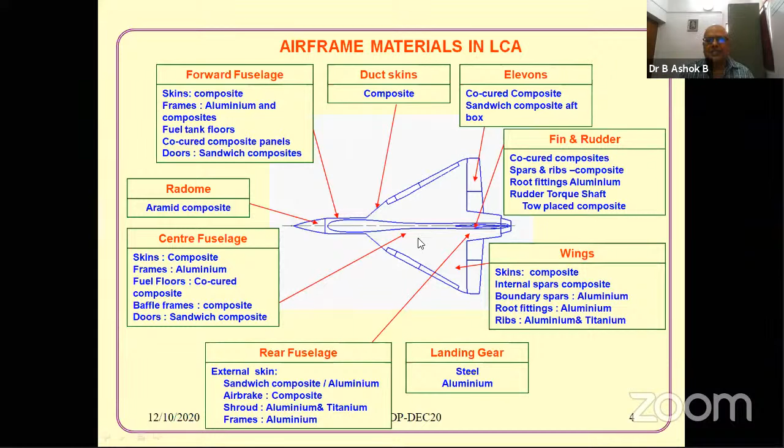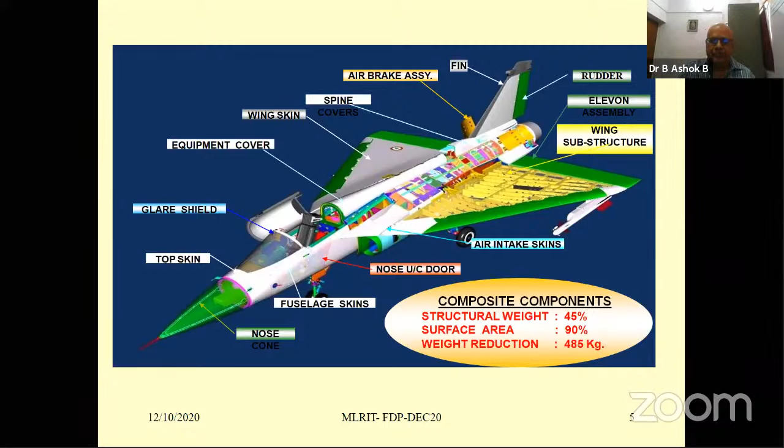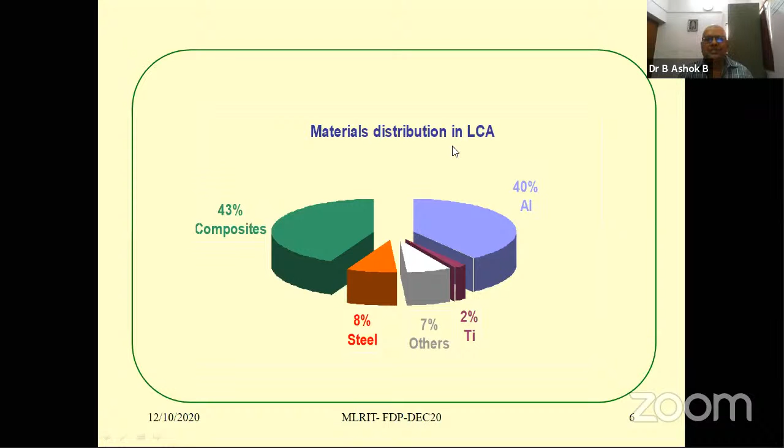Now, you would be wondering, the topic is about smart materials. Why are smart materials not shown here? Because they are much less than this, around 0.5%, but they play an immense functionality role. So if you are taking it as a percentage, they will be very less, insignificant perhaps.

Then I thought I should give you some history of how the materials got developed. I'm sure being in the aero field, you'll be knowing how aircraft design has changed, right from the days of the Wright brothers to the present day concept. Now the most advanced concept we are trying to make is air breathing engines, and also what is called multiple engines, and of course the hypersonic flow engines.

Now if you are looking into the materials as such, basically materials development here has been driven by design drivers. Up to 1930s, right from the Wright brothers' days to the 1930s, the primary consideration was static strength.

Then from the 30s to the 60s, what happened was they found many aircraft got corroded, some were failing because of fatigue. And so, apart from static strength, corrosion resistance as well as fatigue properties became the driver.

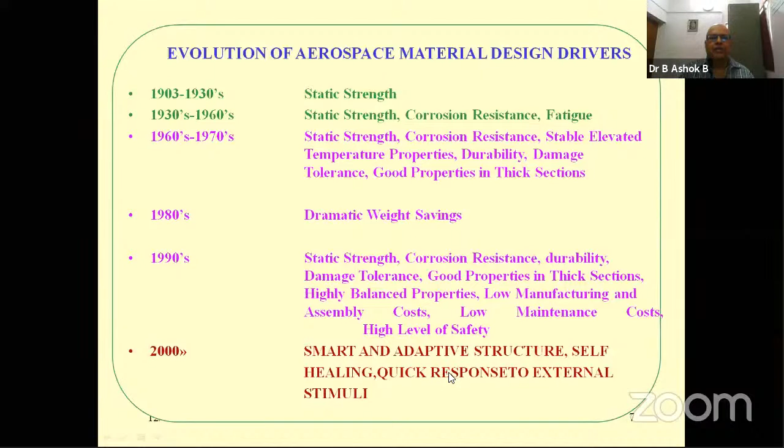Now we'll come to the main topic, that is what are shape memory alloys, how they had revolutionized the aircraft industry as such. Now, they are metallic alloys. Number one, they undergo what is called a solid to solid phase transformation, which can exhibit large strains, recoverable strains.

Now to give some feel - a typical material, if you take in a lab, maximum strain you can get is, I would say, 0.2%. Beyond 0.2, no. But in shape memory alloys, you can have a strain running up to even 7%, and then you can recover it - something like rubber. That is the beauty of this.

Then there are some terms you should know. There is a room temperature phase - this austenite phase, which is a high temperature phase, and typically it has a cubic crystal structure. I will not go deep into the crystal structures. Then there is a low temperature phase, the martensite phase.

Other thing is, many of you would think martensite means it is very hard. No, martensite is hard only for the iron-carbon system. Only in steels is martensite hard, but in other alloys like shape memory alloys, titanium alloys, martensite is a very soft phase.

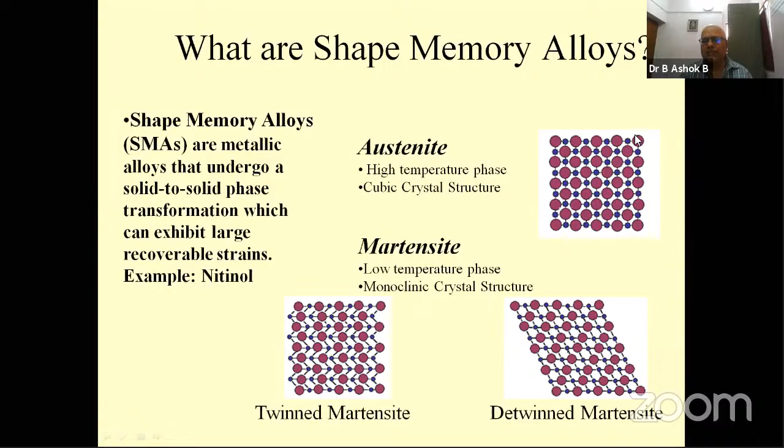Now I'll give an example. If you are taking some aluminum alloy and deforming it, now if you bring it to this shape, macroscopically you can bring it to this shape, but the atomic configuration will be different. But in the shape memory alloy, the microscopic transformation is repeated at the level of some atoms. So we are exploiting this property.

Now we come to thermally induced phase transformation. How do you induce the phase transformation? One way is to supply the temperature. Now when you supply some temperature, the phase is getting transformed.

Now you have to remember some terms here. When you are cooling, you have what is called Martensite start and then Martensite finish, because this transformation is happening in a range. Only in the case of pure metals do you have a single point transformation, but in alloys it is in a range.

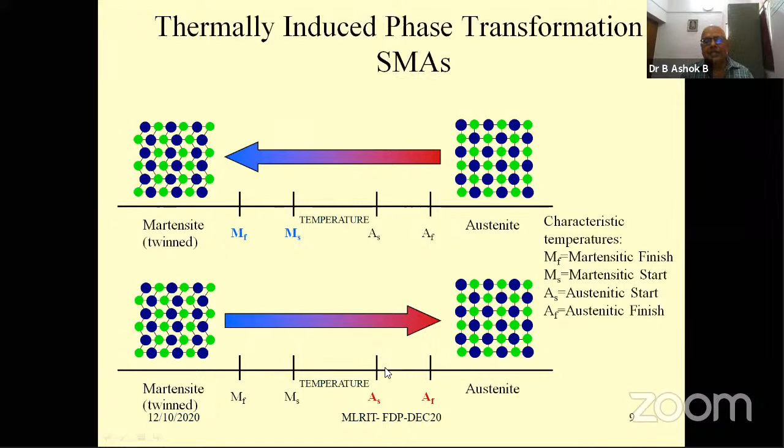Similarly, when you heat it, you have what is called Austenite start and Austenite finish. So these are the two terms you should know, and designers should know this because it helps in the design.

Then the shape memory effect - what do you mean by it? So here, what you are trying to do is either by temperature or by stress, you can change the phase. And this phase, when you remove the stress, it will go back, and then it is back to the original phase.

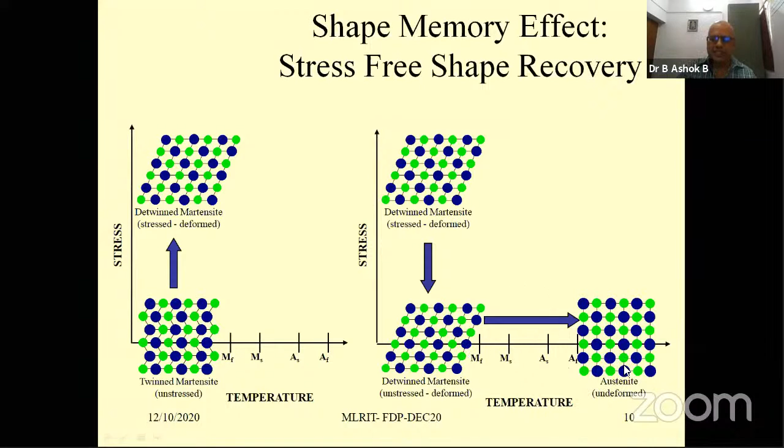So here the atomic level and the macroscopic level are perfectly repeated. This is called twinned martensite unstressed, detwinned martensite stressed, and then when you are heating it - heating means bringing it from liquid nitrogen to room temperature - it will come to austenite, which is undeformed.

Now this is the shape memory effect. Now you can see the stress and strain as you supply the strain. This can go up to 7%, something unique, and this 7% can be recovered back. But if you go beyond this, instead of martensitic transformation there will be some other transformation, and so repeatability is not there. So this is how it is. Now if you release it, it will go back to here.

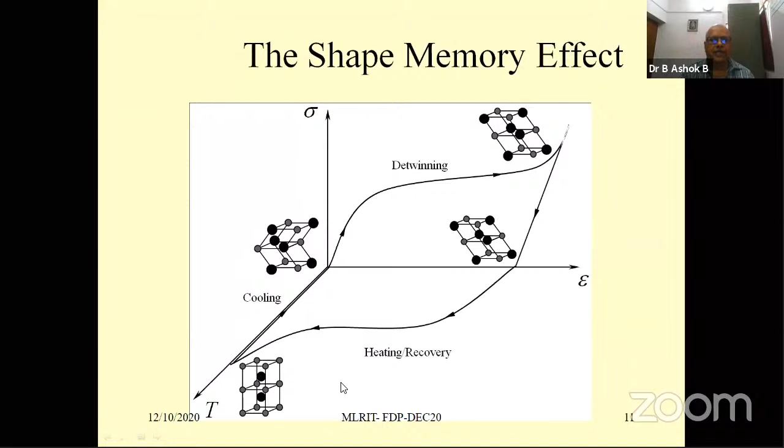Now how can engineering products use this? Now take what is called the pseudo-elastic effect. Pseudo-elastic effect means it acts like a rubber, it will stretch. But then this stretch can be recovered.

Example: take your spectacle. Those wearing spectacles like me know the nose bridge here - by repeated use, the nose ridge is not stable, it will not tightly clip your nose ridge. And the frames, because of frequent use, there will be some change. Now with this shape memory alloy, it will be repeatable. And these frames are already there in the marketplace - they are called titanium frames.

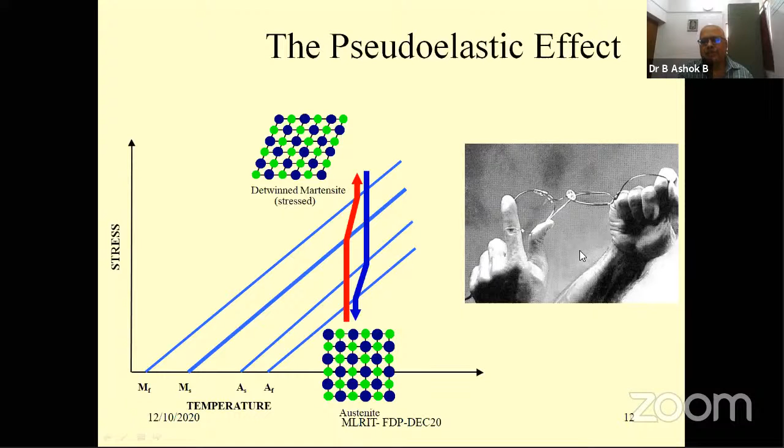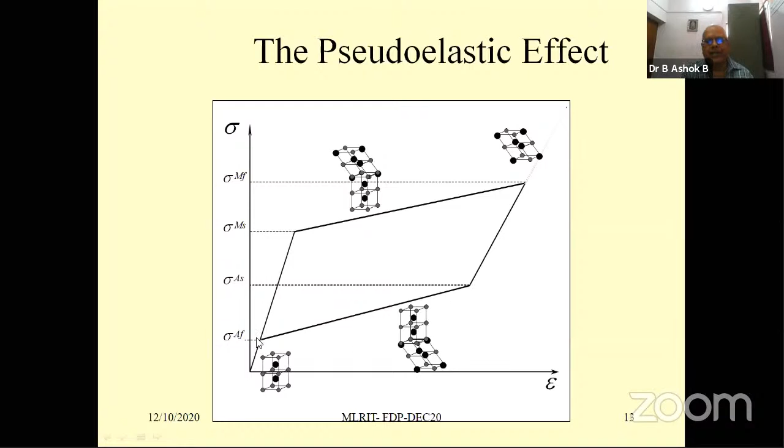Then there's the pseudo-elastic effect. You just see here - you can either supply stress or temperature. Here it is stress, and then you can apply strain, and you can see here, you can recover it back just by removing the stress.

Satya Prasad, do you have any questions?

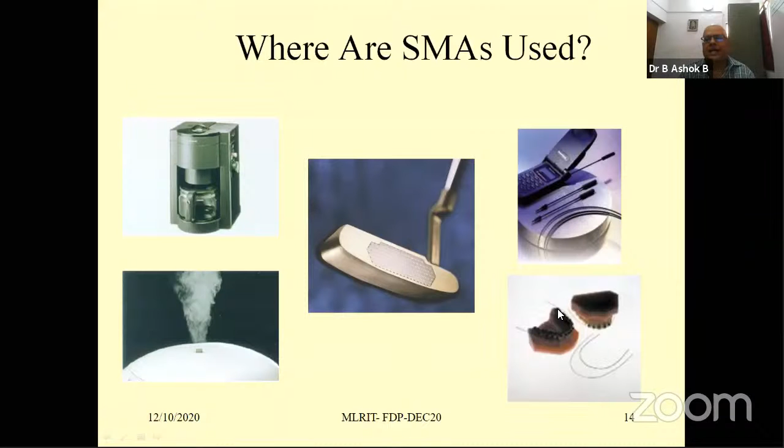Then there are biomedical devices. I would say nearly 80% of shape memory alloys are used in stents. These stents are just like a balloon with a catheter. It will go to the prescribed place in the heart, and at that place the balloon will expand in a controlled manner, removing all the clogging. In the advanced stage, you can also have drugs released at a prescribed rate built in.

Then here you can see the spinal support. When using shape memory alloy wires for spinal support, the spinal cord stays in place. People get pain only when the spinal cord moves. When these wires firmly hold the spinal cord, there is no movement of the spinal bones, so comfort level is high.

This is the denture wire. Okay, then that was covered.

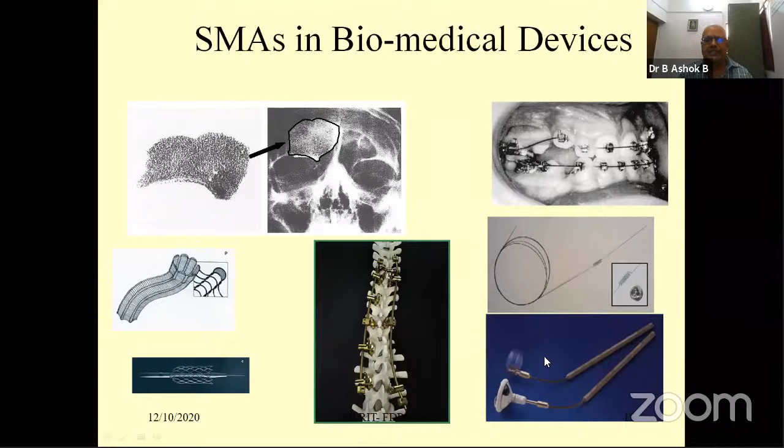Most production of shape memory alloys is in wire form, and here you can see a kind of resistance used basically for temperature control, which I will talk about later. This is how we can have an ejection system made out of shape memory alloy.

Shape memory alloys have also been used in Land Rovers. You can see the Land Rover here. It is used basically for actuating the rollers here, and this is the structure.

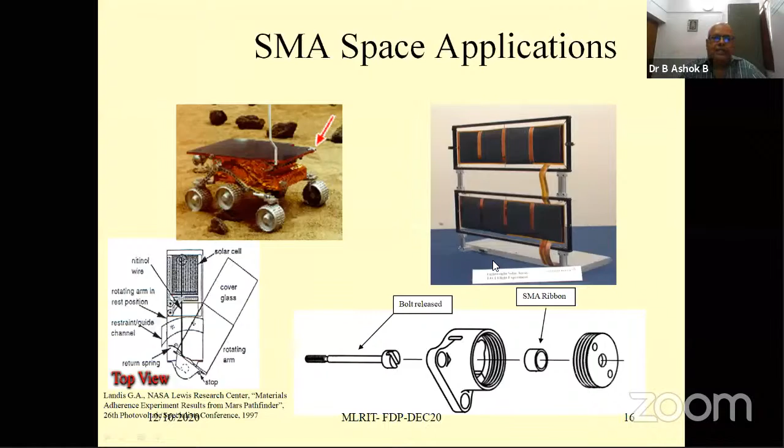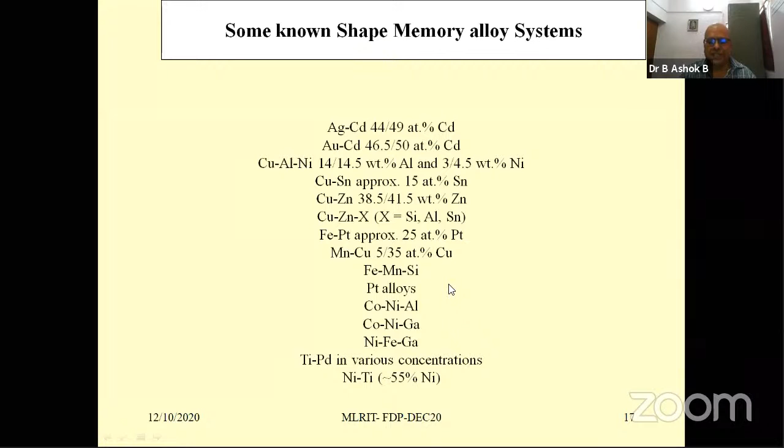Nickel titanium binary alloys are the thing here. The beauty of this is that by changing the crystal composition, nickel-titanium at times with copper also, you can have different transformation temperatures, so applications can go from minus 50 degrees to plus 100 degrees. Others are not used much. Platinum-based alloys are used for high temperature shape memory alloy applications, but they are still in the research stage.

Next I will briefly tell you the difficulty in making this alloy. For metallurgists like us, the basic route map is the phase diagram, which forms the basis. If you see the shape memory effect, it occurs in a very small, narrow composition range.

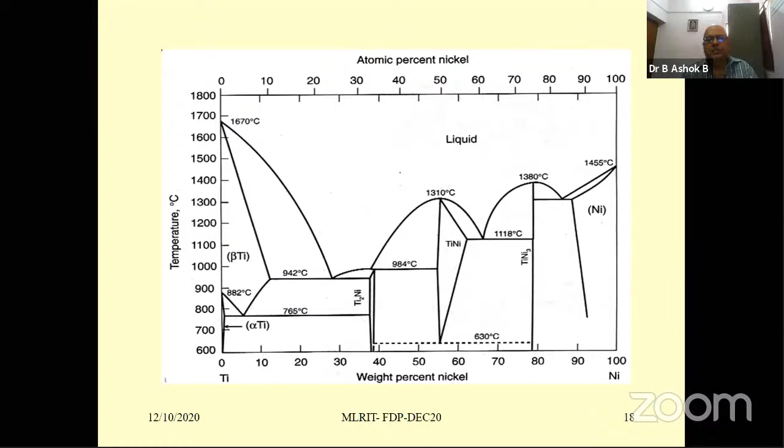That narrow range is about one atom percent, so your melting has to be very strict. It is something like semiconductor making, though not as tough as that, but I would say it's between conventional alloy melting and semiconductor melting. Since it has a very narrow composition range, you should have melting discipline, and the impurity level should be kept to the basic minimum.

You can see the small line. So now typical engineering alloys, if you see, the composition range will be huge, like 3 to 3.5%, and then 0.5 to 0.8%. But here it is in atom percent.

Here you can see as you change the nickel content in atom percent—because in engineering alloys you'll be using the concept of weight percent—as you increase it, the transformation temperatures will go down. You can see here it is almost minus 100 degrees C. Normally we go up to minus 80 degrees C, and the upper range is very close to 90 degrees here.

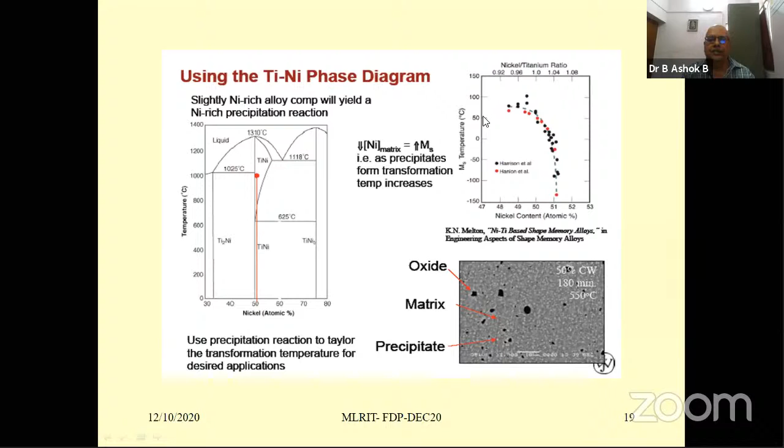And this is the microstructure. Then what are the requirements here? Now, having a shape memory alloy, if you want to make it work for the aircraft, what are the requirements? Basically, performance and reliability under sharply fluctuating conditions.

As you know, aircraft temperature varies from minus 50 degrees to plus 150 degrees C, and there are G loads—on Tejas it is 9G, but on other aircraft it can be much higher—and it should sustain vibration loads. It should operate in all weather and meet the project goals.

The project goal is reduced weight and volume, because once you open an aircraft, it is all jam packed. There is no place even to service or put your hand in.

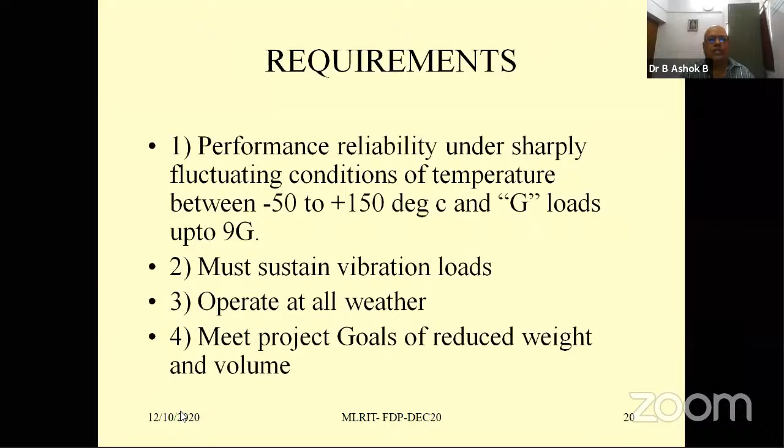Now, our testing protocol is basically designed to fulfill these requirements. We have used the shape memory alloys basically for the conduit tubes.

These conduit tubes go into the wings, and as you know, the wing is a fuel tank. This is the typical conduit tube. Outside the conduit tube is fuel, and you can see the aluminum rod, the aluminum tube, and the shape memory alloy ring—a small ring which will securely clamp. This is the insulator, and then again the circuit. So basically, the shape memory alloy here is clamping the insulator, which is PEEK, to the aluminum tube.

Now why have we used this? Using carbon fiber composite, you have to pay a penalty—the penalty being that static charge will be accumulating. The static charge comes because of lightning.

I think you will know that lightning occurs every minute somewhere in the world, and I'm sure some of you frequent air travelers would have also observed lightning at close range. Now when this lightning happens, there is a static charge, and when the static charge occurs, it will lead to a spark. The spark can ignite fuel and burn the aircraft.

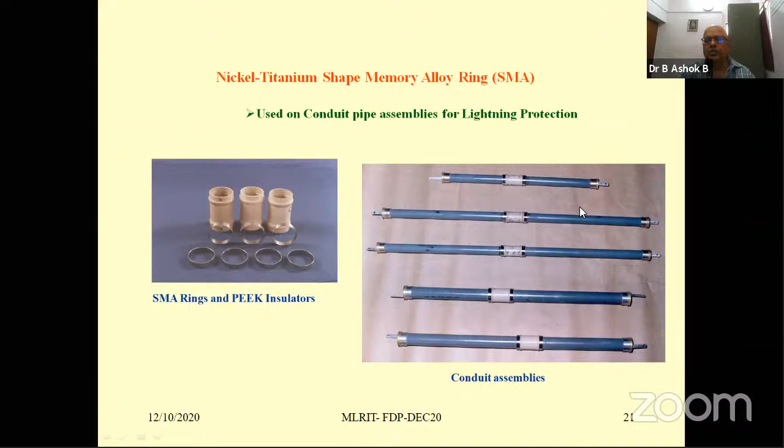So, as a shield against the static charge, we have used an insulator here—PEEK. So the static current can be blocked here.

Now you can see these conduit pipes go here, and these conduit pipes carry hydraulic oil, fuel, or they can also carry harness wires.

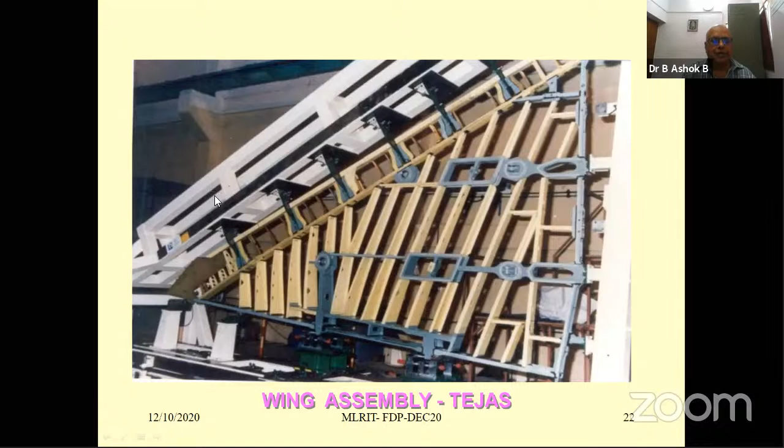So this is the wing here, and the jig here—of course the jig is a critical part, and it should have close dimensional tolerances, less than 0.1 mm. Then you can see here, this is the insulator, this is the thing.

Now, next point—being an engineer, why is it that we have gone to shape memory alloy and not to other means? Initially, when we had difficulty getting it from the market, because being a high technology item we were not getting supplies, we tried some other methods.

Now here the requirement is, once you close the wing, it is shut for nearly at least 15 years. So for 15 years it should work safely and securely. Any other joints we tried, like clamping and all, were giving way, and that led to another set of problems. Once the joints give way, it leads to catastrophic failure for the aircraft.

So we have used these shape memory alloys. Now I can tell you, so far the aircraft has flown in our border regions—in the Eastern Ladakh region, in Eastern Kashmir, and in other places. We have clocked more than 30,000 flight hours, and so far not a single failure has occurred. That is the kind of reliability we are getting from this.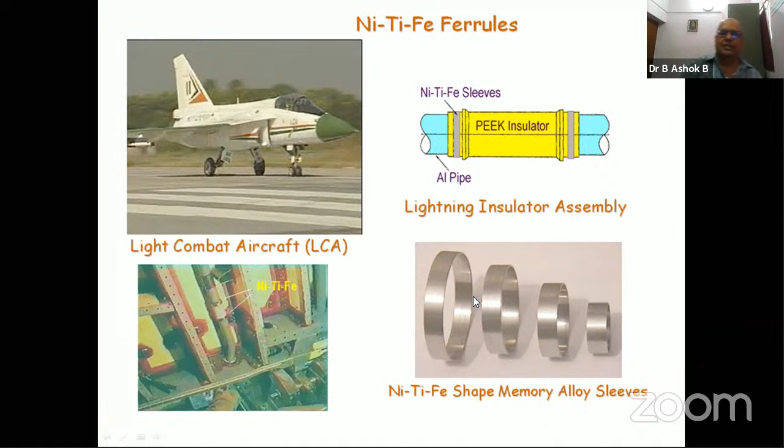What about the sleeves? Okay, then you can see the fuselage here.

Again, you see the jig here, and the fuselage is made of various stations, 1 to 1,000 stations, and for each station you will have a certain engineer to look after it. So assembling it is a unique challenge here.

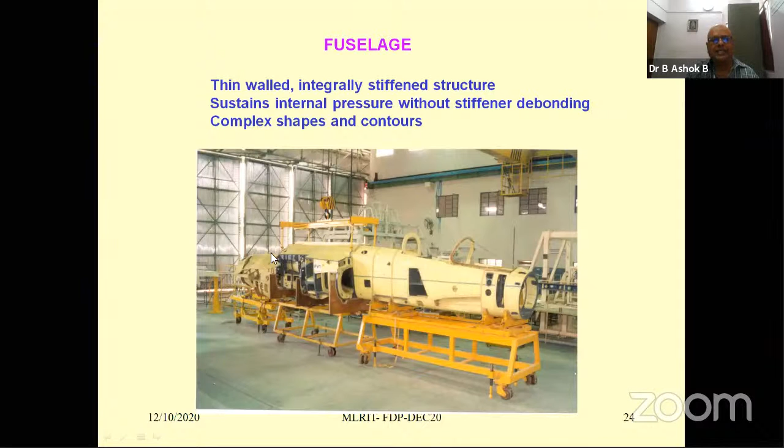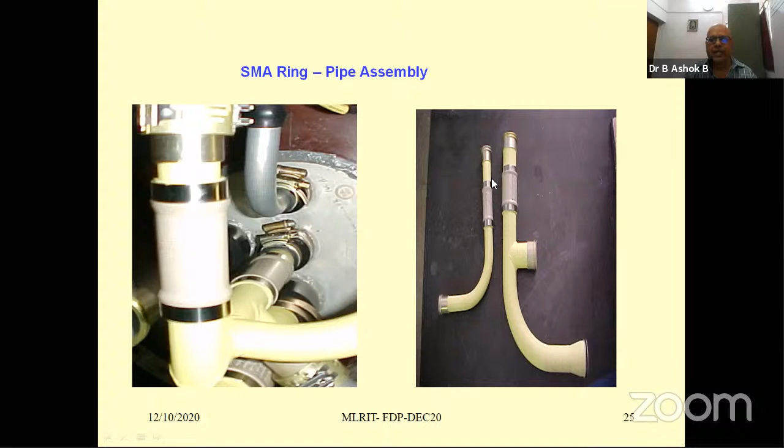Then you can see in the drop tank how the shape of the alloy conduit pipes are going. You can see the ring here, insulator, aluminum pipe, and inside the drop tank it is going. This is the assembly here.

Then here, what is this? This is what is called the constrained mode of recovery. What you basically do is you try to cool it first, then expand and deform it. So your design would be such that it is just equivalent to the outside diameter, or even slightly less.

When you cool it, the martensite comes. What is something like 72 kg per mm square becomes something like 6 kg per mm square.

You can also deform it by hand, but since you are using liquid nitrogen, you use a tool to expand it and increase the diameter. At this point, when you put it in from the liquid nitrogen and leave it in air, that is equivalent to heating. So it will remember its original shape and try to come down.

So what happens is in this process, the strain is constrained. When strain is constrained, you will have clamping stress, and this clamping stress is a constant value. It is constant here.

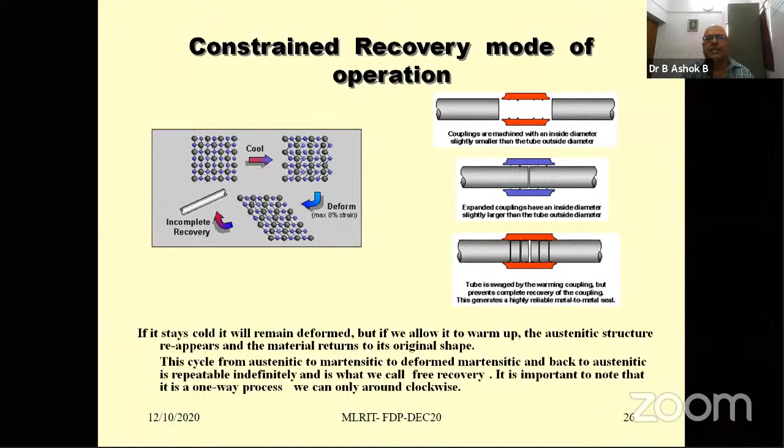That is the advantage. Now, what we thought was, after this, we have many tube joints, and for these tube joints too we thought we could do this. The advantage is the weight is very less.

Earlier we had swaging type joints. In swaging type joints, this Permaswage and others, it was something like 100 grams. From 100 grams, this is hardly 2 grams. If you have something like 1,000 joints, just see the kind of weight savings.

Then you can also have fasteners. The beauty of these fasteners is you can give controlled torque. In many areas you need controlled torque, and this controlled torque will be constant throughout the service life.

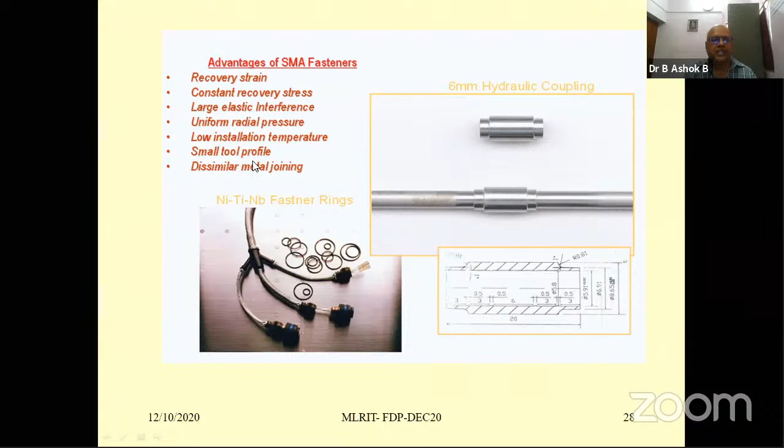Advantages of these SMA fasteners are recovery strain, constant recovery stress, large elastic interference, and radial pressure uniform throughout - no matter the size, the stress applied is uniform. The tool profile is very small, and you can do dissimilar metal joining with it.

Now this is the SMA technology: austenite, cool into martensite, deform - 8% is the limit - and then if you warm it, it will come back. This is an inherent property of the material, and it is repeatable. You can repeat it for several times.

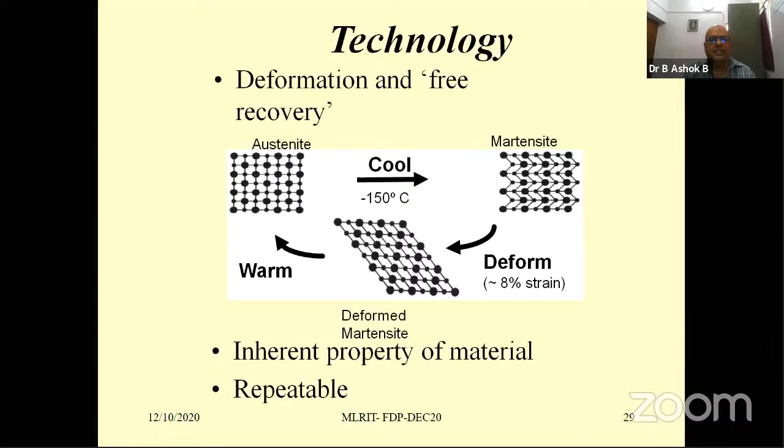So what we used is the one-way shape memory alloy. By doing this repeatable thing, you can also have applications based on the two-way shape memory alloy.

So this is the installation. You can see the tube, it is cleaned, sealant is applied, and here you can see the insulator piece where sealant is applied in the ID.

Now it is matched, now inserted, and you can see the SMA sleeve. You're using a tool to expand it because it is liquid nitrogen - you can't put your hand there.

Now there is also another problem - he is doing it without gloves. Normally, since this technology was ours, we have told that these things should be done with gloves, because you are dealing with the liquid nitrogen tank here. And then, this is the tool here.

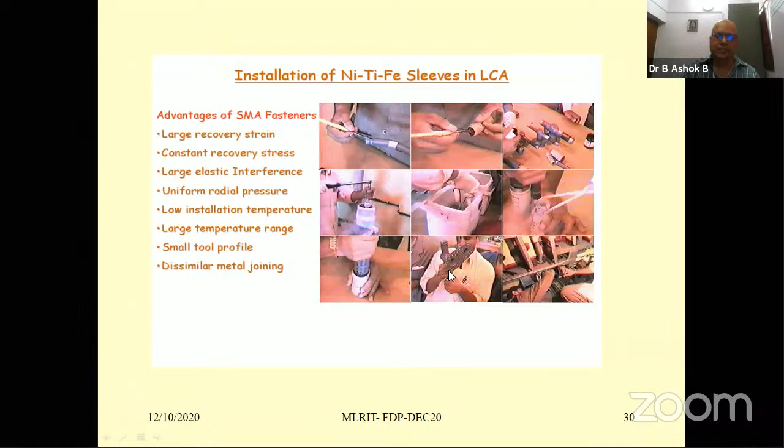Then we thought we could go to the next level. Another beautiful application is the wavy springs. In these springs, the design thing is you will see the spring constant. The deflection is directly proportional to the applied stress, and the constant factor is the spring constant. But the beauty in these wavy springs is there is absolutely no vibration at all when you have these springs in motors or other places. The vibration energy is being converted into transformation energy, the entire vibration energy is transferred, and then it will be a quiescent kind of working.

Now this idea I got because I had seen in seismic areas like Japan, they use shape memory alloy blocks at the foundation level. So during any earthquake, the seismic vibration will be absorbed by the shape memory alloy block, and it will not get transferred to the buildings. Based on that, I tried this concept, and this concept has worked.

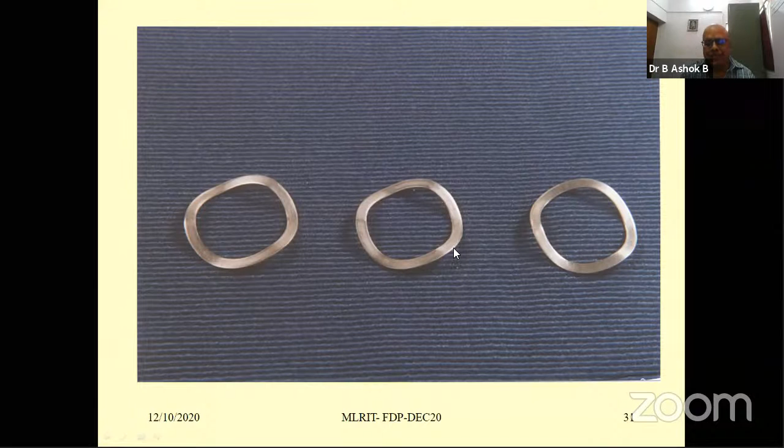But the real problem here is how to design this. Then I thought I should tell you what are the current international efforts.

What we have done is at a shoestring budget, hardly 5-6 lakhs, we developed some technology, but in other countries it is at much more massive scales, by several orders. One such thing is the DARPA program, where there is collaboration between industry members and universities. I am happy because I try to involve many institutions and colleges into our program. I do see now, compared to those days, there is a lot of collaborative effort, which I think is going in the right direction.

Then there is the shape memory alloy consortium, made up of four universities and three companies. Then there is the SAMPSON program, where government agencies, universities, and companies are involved. So the basic aim is this is an interdisciplinary effort.

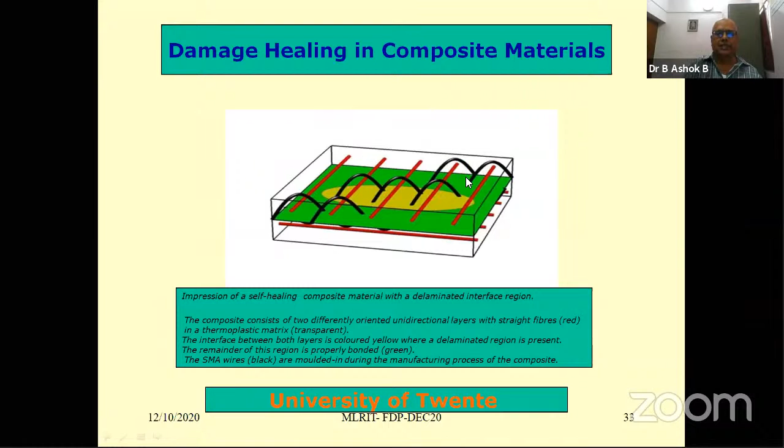Then next is how to have structural health monitoring, because why we are very keen about this is aircraft typically cost anywhere from 300 crores to something like 2000 crores, and maintaining its structural health is one critical need. So here we are trying to see if there is any advanced means to know if any defects are inside.

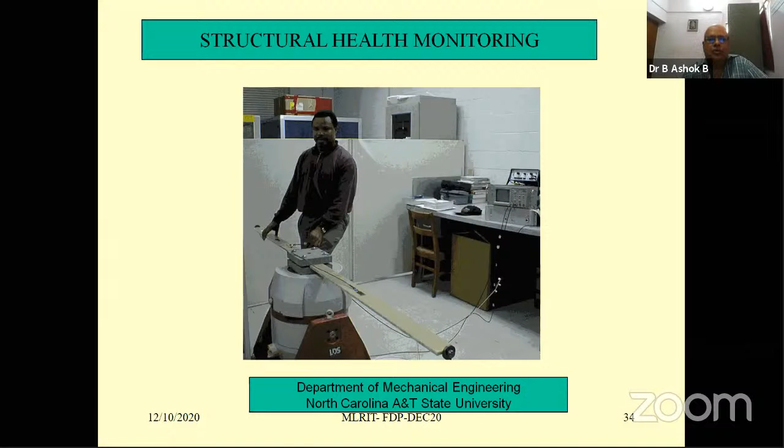Then another important application currently being practiced addresses one problem with airports: noise. There is now an international guideline that noise level has to be less than 80 dB or so, I'm not too sure about the exact number. 80 dB, I do remember. Now how to reduce the noise?

One way is to have a shape memory alloy in the engine, at the outlet nozzle, as we call it. So here what happens is by increasing the diameter, the noise level can be reduced. This is one such technique, and it is already practiced in Boeing aircraft.

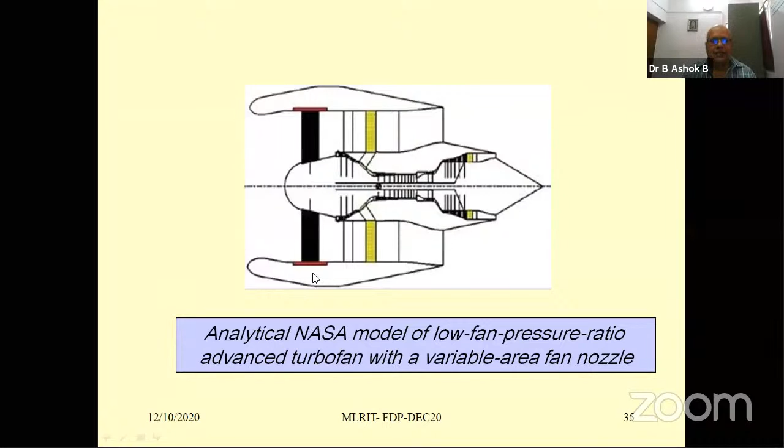Now, of course, what you see is an application, but to achieve it there were a lot of calculations, a lot of trials, a lot of frustrations. This happens with any new product. So here you can see how the shape memory alloy is used to control the noise.

At the starting point, what happens is near the airport, it will simply expand. Once it expands, the decibel level will come down.

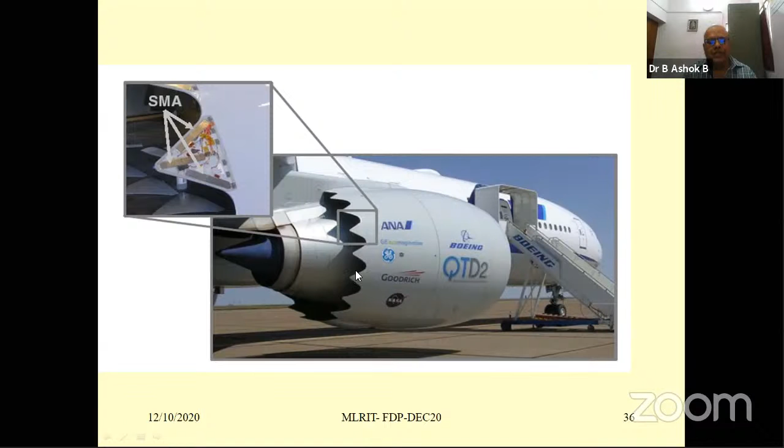Lockheed Martin also worked on this. Why not have bird-like flying qualities? Can we fly autonomically? Most aircraft technologies have basically been copied from birds.

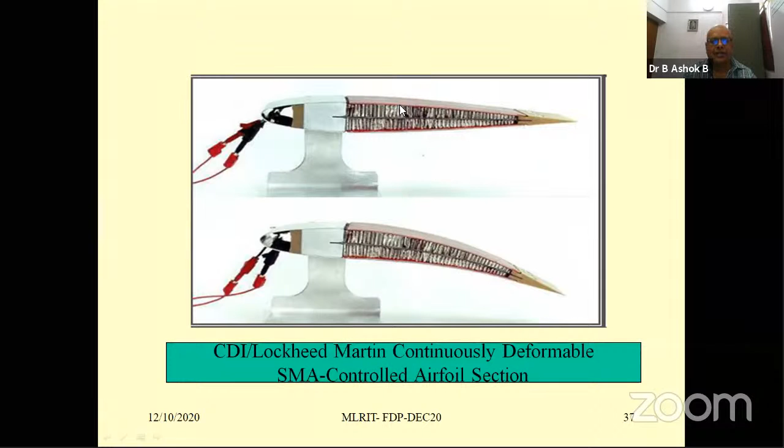Now this is the next stage, using shape memory alloys. This is again laboratory type work wherein they are trying to have autonomic movements.

Now how was success achieved? For any success there is a lot of frustration in the cycle. First, we went through basic science. We did not go through any other route; we went basically through the paper-pencil route, computation of clamping stress, which is based on aircraft designers' inputs, then understanding them.

Then you need to do alloy design, which is based on the above. For this we use tools like Thermocal, because you should know what alloy you should use.

Then the process design, which is based on coupon test. Then processing maps, we tap the IAC there. Then fine tuning the melt, which is based on computational thermodynamics.

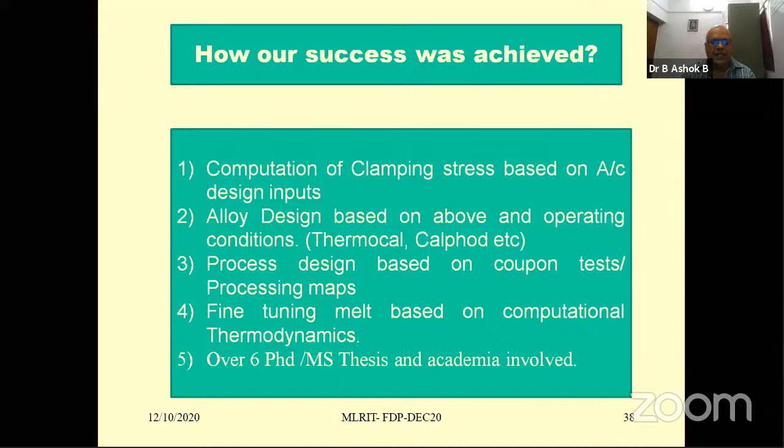Based on this work, what we also did was involve young minds at various institutes. Over six PhDs and MS theses were produced from this project.

Then what were the design issues? First was clamping of joints. Traditional interference joint design won't work. Instead, you have to use the transformation enthalpy, and with this calculate the elastic strain energy, and then come to the isochronous clamping stress. It's a very simple hand calculation; isochronous thermodynamics will also do.

Then for springs, the traditional spring constant approach will not work. Instead, the design should be based on minimum energy level. The trick is to convert all your design inputs to the isochronous energy level, and the transformation is having an energy level.

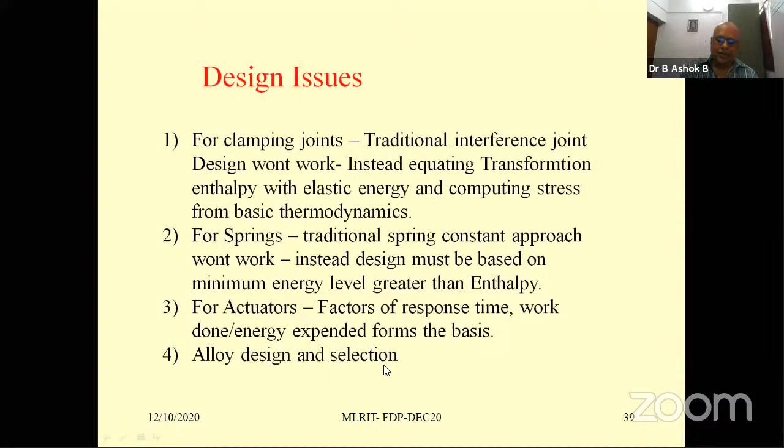Then what are the issues and concerns? Some limitations - any new material has its own plus and minus points. Plus points we have spoken about: reliability is very high.

Minus points are: it is difficult to design, because design is based on new concepts. Then the disadvantage is it is notch sensitive, it has poor fatigue, and then it is costly.

Now, one thing unique was our cost price was a fraction of the cost price of the same material abroad. So this is a case where indigenization effort resulted in huge cost savings.

Now this cannot be used as a structural member, so it can be used only for a functional member. Then the other thing is the degradation mechanism is not known, because all I can tell is up to 15 years you can use it, but beyond 15 years, unless you have tests done, you can't say.

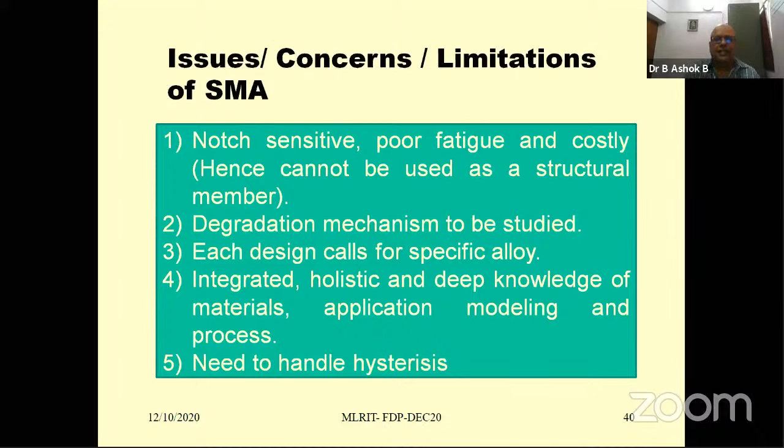Then each design calls for a specific alloy. It is an integrated, holistic, deep knowledge of materials, applications, and modeling process. It is an interdisciplinary approach, because I would call aircraft a cocktail of all technologies. I'm sure you as aero engineers would agree with my view, and then there is a need to handle the hysteresis - that is a real challenge here.

Then what is the difference between conventional engineering materials and shape memory alloys? The design is based on conventional methods, but shape memory alloys are designed for a given application. You can buy a steel bar or steel rod from the market, but in shape memory alloy, you have to design right from the alloy stage to the melting stage - whatever it is you want.

Then quality checks - here the standard specifications are there for chemistry and mechanical properties.

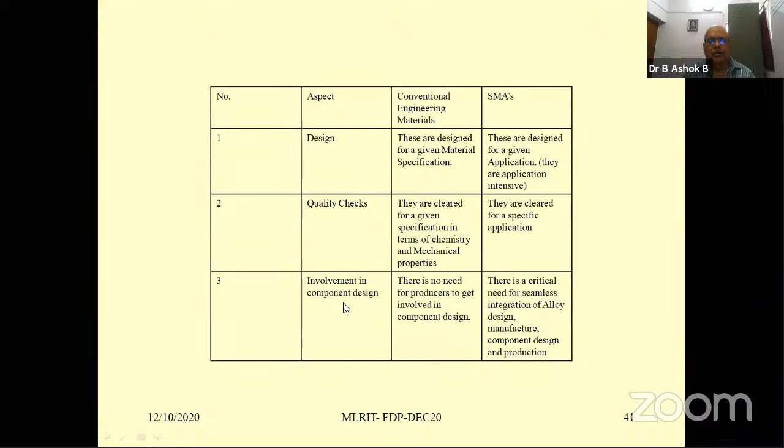Here, clearing is only for applications, not for properties. Then there's the involvement in component design. There's no need for producers to get involved in component design. If you make a steel bar, there's no need for you to talk to designers. But here close involvement is required.

Then coming to structural design, it is somewhat easy in conventional alloys - a linear model - but in shape memory alloys you're dealing with non-linear behavior, so you have to use FEA tools. Then if you see the usage, it is general purpose engineering, but SMAs are used only for specialized applications because you can't use them for structural purposes.

Then manufacturing - it is repeatable, you can achieve 3 sigma level, but here each melt needs to be engineered. Then the QC tools - conventional lab mechanical testing is okay, but here you need sophisticated tools like DSC, XRD, TEM.

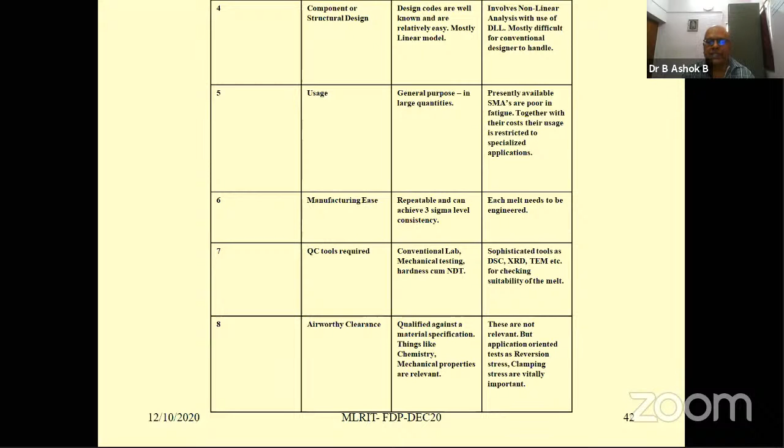Then airworthiness clearance - just to brief you, before you put anything into the aircraft, whether it's a pin or a sleeve, you should have an airworthiness clearance, and these airworthiness clearances here are a challenge. Okay, then what is the strategy we had?

We thought we should create our own indigenous production facility, create a center of excellence wherein there is material modeling, application engineering lab, and of course integrate all of this.

Then, of course, we had tasted some success. This is the 20 crore plant. This is a shape memory alloy plant, first plant in our country. I would say the first dedicated plant in the Asian continent, and maybe one in three or four in the entire world. So we had established it.

Then we had the roadmap of the SMA products. Having created the plant, having created the SMA facility, you should also have applications. One is conduit tube SMA fittings, which you have done. Cryofit for high pressure hydraulic tube SMA coupling.

We have done wavy springs. Then the temperature control valve - now what we do is we are using wax. The problem is after some time the temperature stability is poor, but in shape memory alloy temperature stability is high.

I'm sure even in your Maruti cars earlier the temperature control valve was wax based. After some time you will have to replace it, but if it is made of shape memory alloy you can use it throughout the service life.

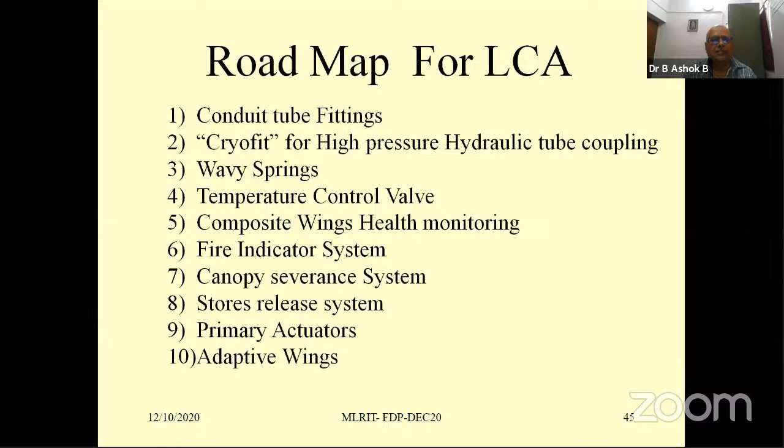And then the canopy severance system - how to sever the canopy. I'll have a slide later, I'll show that. And then the stores release system, how to release the bombs and other things. The next slide I'll show that later. Then primary actuators and the adaptive wings - that is the ultimate goal. Of course we were able to achieve some 3 or 4 by the time I retired last year.

Then this is what is called the canopy severance system. Now if the pilot is faced with an emergency and his life is in danger, what he will do with the present concept of canopy severance system - there's an RDX layer, which you make for bombs. He will activate that, it will burst out, and then the seat ejection system is here. The pilot will eject, and then a parachute will be there to drop in.

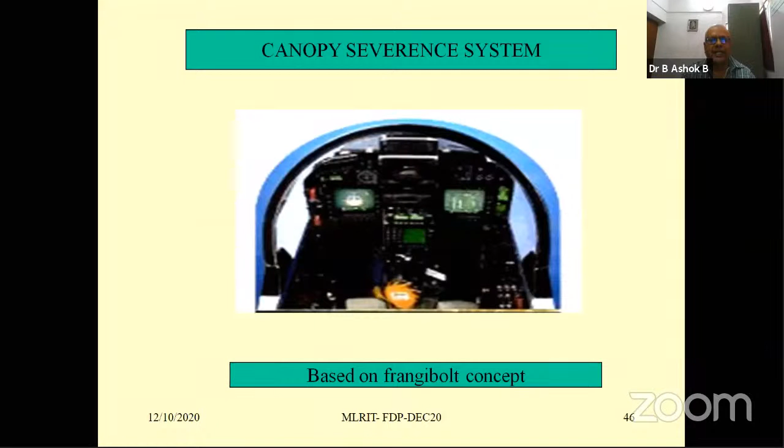Now, in the present concept there's a frangibolt. Instead of having this RDX, we'll have a frangibolt with a notch - a pre-stressed notch - so that once you apply stress there, it will break out and then it will come loose.

So for the fire sensor, as I told you, we are using the chromel-alumel wire. Now the proposed scheme is an SMA wire with the transformation temperature at 100 degrees. That way we can detect any fire there, so there is no false signal here.

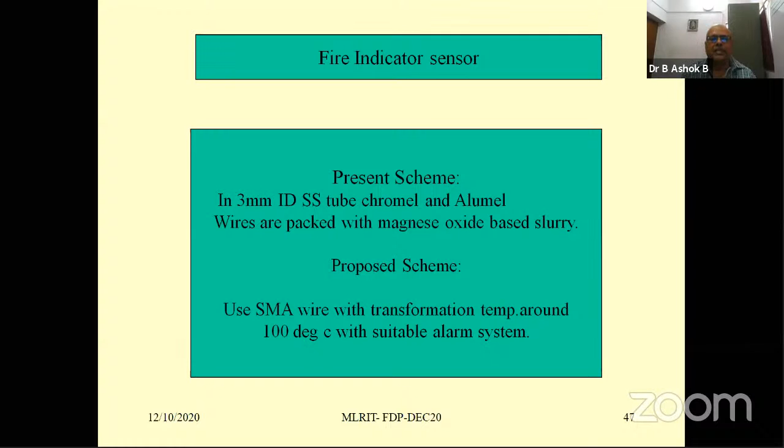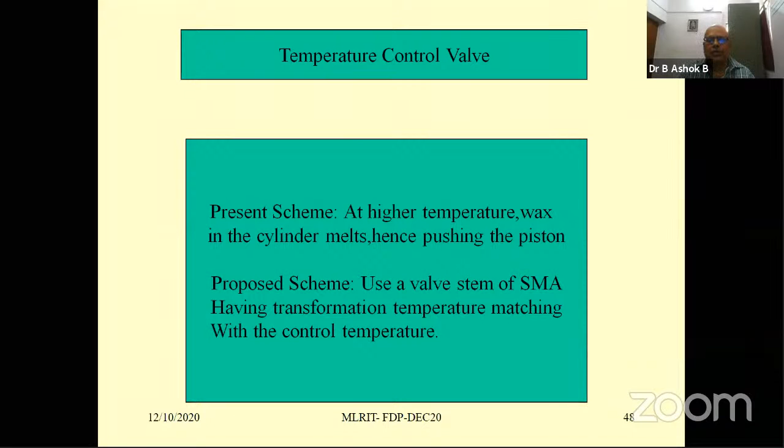Okay, next is the temperature control valve. From high temperature wax, we go to the valve stem, which is made of shape memory alloy. These are the SMA actuators used for this thermal control valve.

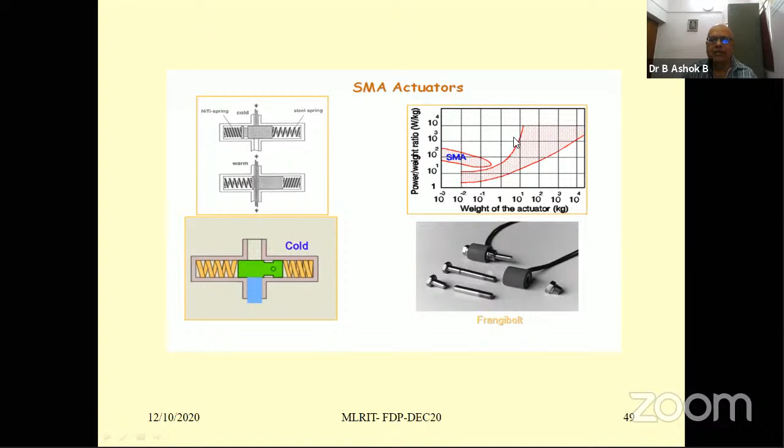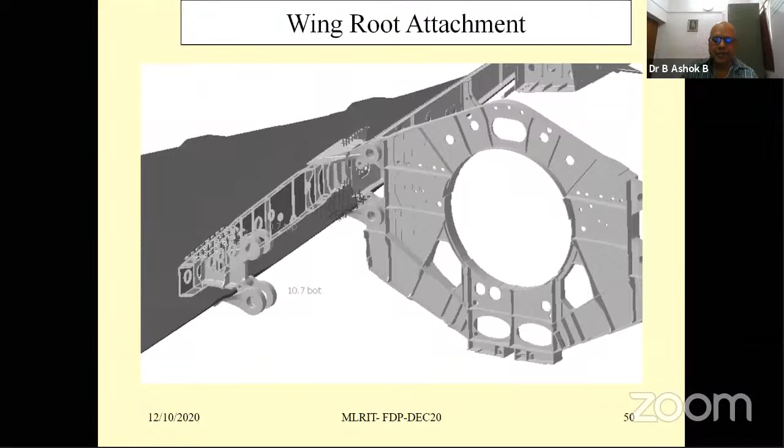So here, what we do is use a bolt with a predetermined torque - the torque is constant, and what happens is you get absolute safety, predictability, and reliability.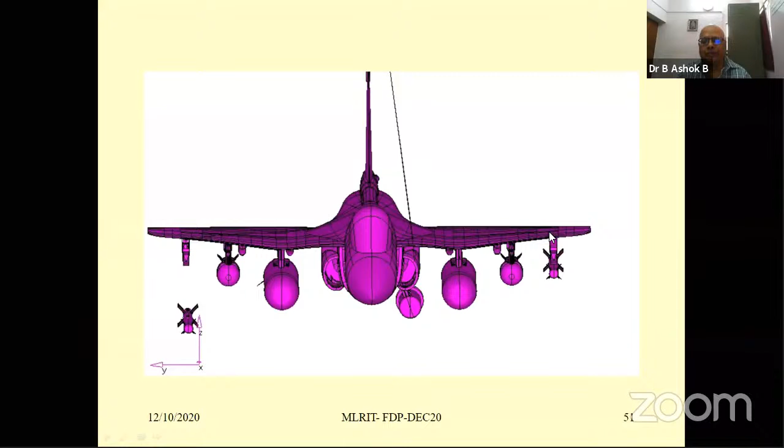Then coming to the stores - what I mentioned, these are the stores, bombs, various bombs. These are laser guided bombs, and you can see the air intake here. To release them, we use a hydraulic system. If you have a shape memory alloy system, the release will be faster, and you can release it at a predetermined trajectory, so that you have an efficient means of delivering the weapons or stores.

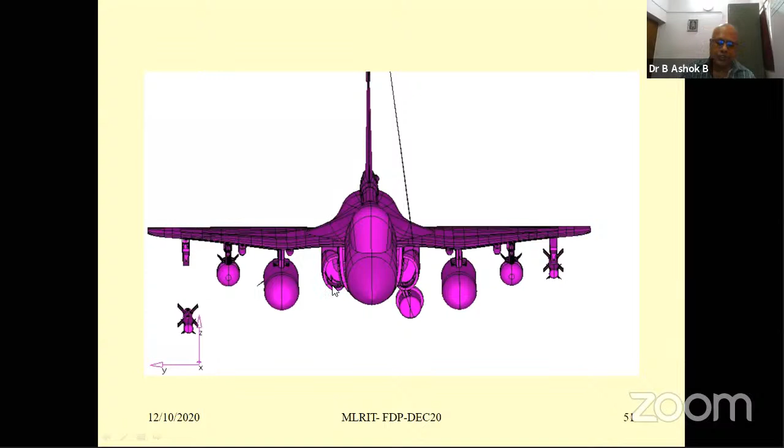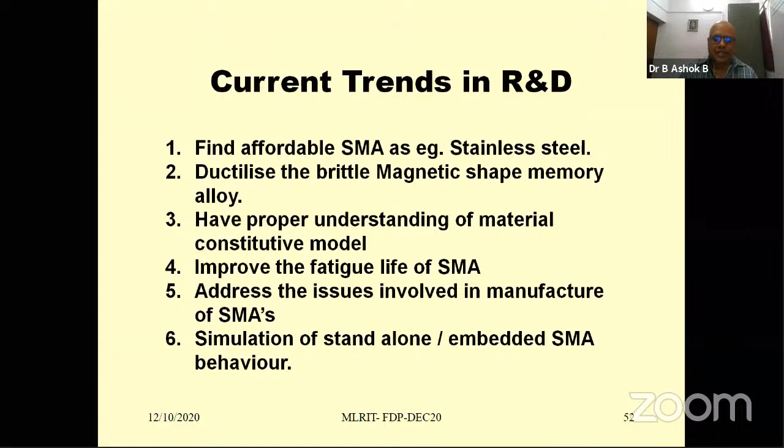Then, what are the current trends in R&D? I thought I should share this with you. First is to find an affordable shape memory alloy - it could be some stainless steel. Then, how to ductilize the brittle magnetic shape memory alloy, also known as Heusler's alloy, since it has a brittle property. We need proper understanding of material constitutive models, improved fatigue life of shape memory alloys, and to address issues involved in manufacturing them, along with simulation of standalone or embedded shape memory alloy behavior.

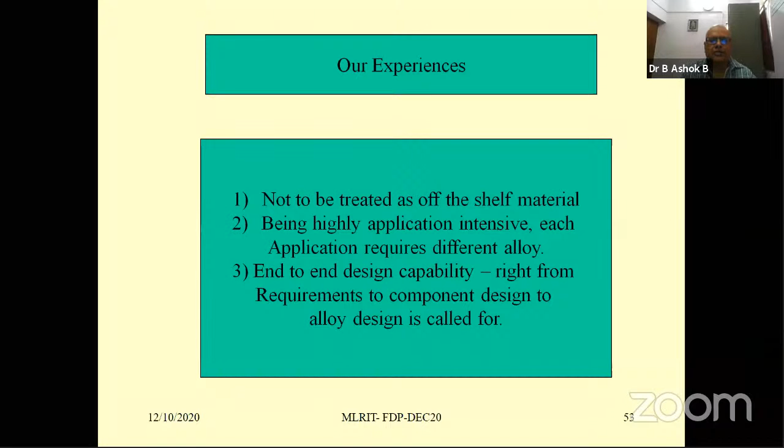What is our experience? Based on what we have done, right from the lab stage to creating a unique facility, our experience is that you should not treat it as an off-the-shelf item. It is highly application intensive - each application is different and requires different alloys. End-to-end design capability is required, right from requirement to component design to alloy design.

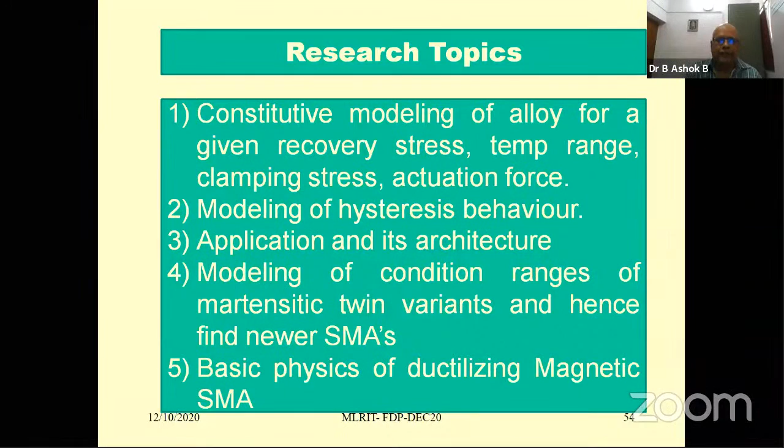Last year I had a chat with a scientist, a professor at Melbourne University, and I was impressed by his work. What he did was attach very small piezoelectric transducers to leaves, and with the wind, he was trying to exploit the wind speed to generate current. I think research is vast and huge, and your thought is your limit.